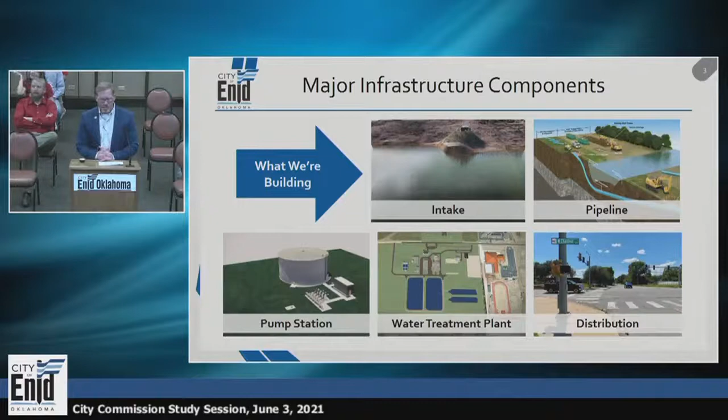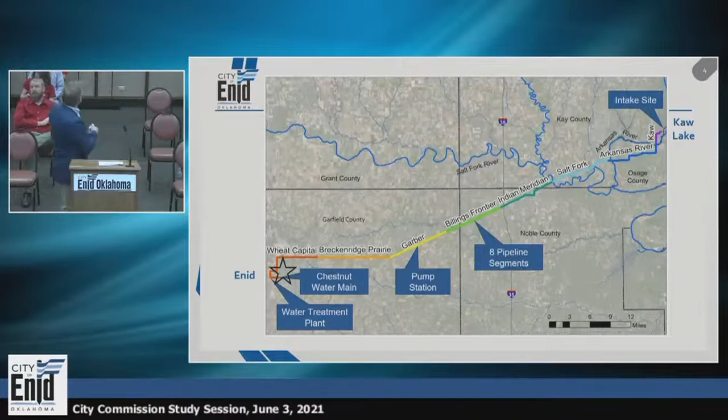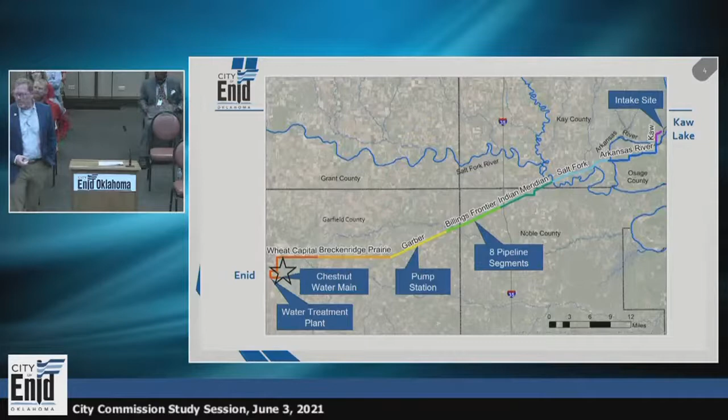And then this is a map that shows what I just talked about. As you can tell, we're starting over at Kaw Lake, which is just on the east side of Ponca City. It runs diagonal across 3 of the counties here into Garfield County, the last county. It does parallel an Oklahoma Gas and Electric overhead power transmission line. They've got a 100-foot easement, and the City of Enid's easements are adjacent, right next to that is a utility corridor across this land. Moving into around the west side of Enid to the new water treatment plant, and then Chestnut Water Main.

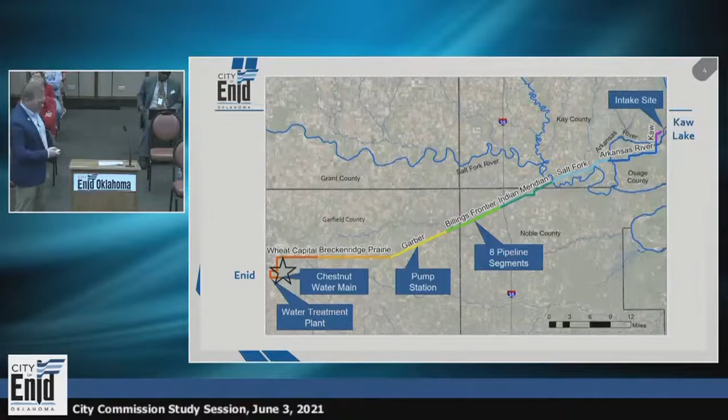All right, design. As you can see here, design is complete. Since last time I briefed, we have acquired 2 more permits from DEQ to construct. The intake pump station has been approved, and Chestnut Water Main. So all the linear work is permitted now, as well as the intake. We'll be finishing up or getting the permit from DEQ on the intermediate booster pump station and water treatment plant shortly. No hang-ups on it, it's just a matter of process.

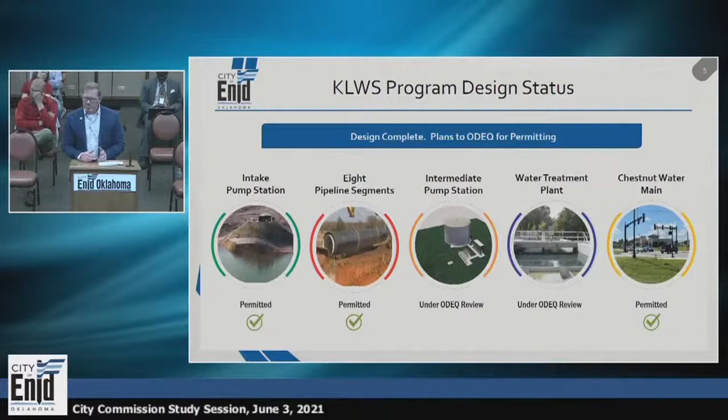Other permits: as many of you are aware, the big NEPA environmental permit was received right at the end of last year prior to getting the authorization for GMP. We also have the 404 wetlands permit approved, the 408 for the USACE land over at Kaw Lake. All ODOT permits are received, so there's 8 ODOT crossings across that 70 miles that have all been approved.

The DEQ, as you can see here, 10 out of 11 have been approved. Union Pacific and BNSF railroads, there's a total of 4 of those. 3 of those are in process. We've submitted to them and should be approved at any time here for 3, and there's another one we need to submit and get that moving.

Our last thing here are the county road crossings. As I mentioned, 4 counties, with a total of 63 county road crossings across that 70-mile pipeline. Garfield County is the first one to start. Those are the bids that were open today, and yeah, we need to get those ones started. So that one is critical.

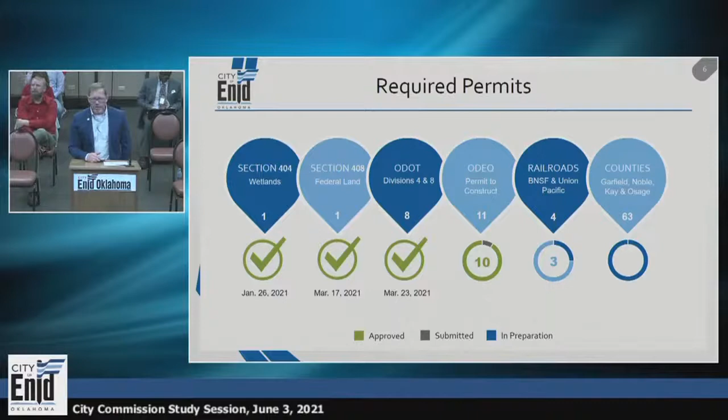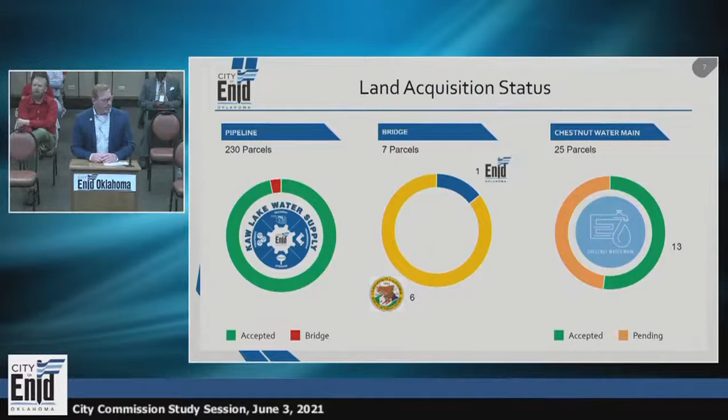Land acquisition has been a phenomenal success story. 2 of the biggest challenges for a long linear project like this are environmental and land acquisition. You've checked the environmental box very successfully, and land acquisition is almost there, continuing to move forward. Out of a total of 230 parcels, only 7 remain. One of those is with the City of Enid, being negotiated, and the other 6 are with the Bureau of Indian Affairs, also in good status. We anticipate those being buttoned up soon, but it will not impact contractors' ability to proceed and do work on schedule.

And last, Chestnut Water Main: 25 total parcels there, 13 of those have been acquired, so 12 left. We're continuing to plug away at that. We started that just in February this year, so in about 3 months' time, we've made a lot of great progress across that 3 miles along Chestnut.

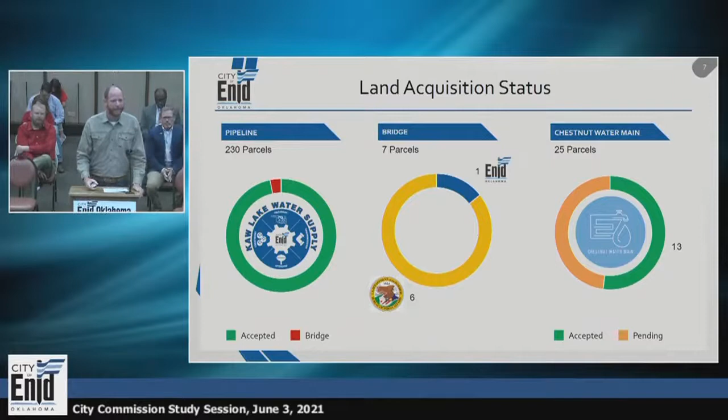Good evening, I'm David Burkhart with Garney Construction. For those of you that haven't met me, we are the construction manager at risk for the project. I'd like to give a very brief update on where we are with construction status.

Currently, we have a couple of things different going on with regards to construction and procurement. As mentioned earlier, we took our 3rd solicitation set and received bids on those today. Very good participation, we're very excited to see that. Received roughly 30 bids on 7 different packages, so very good turnout and we're very happy.

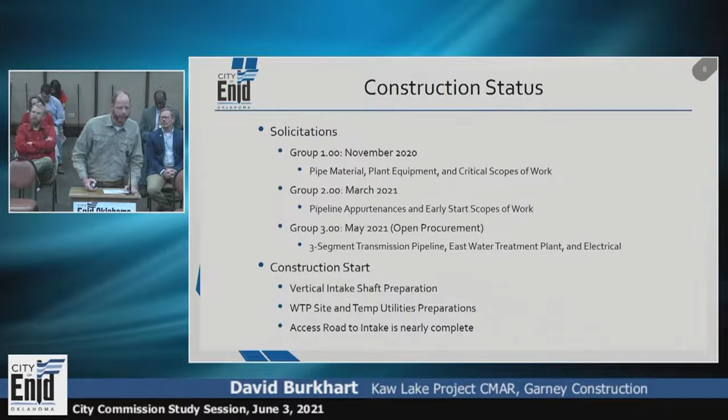Going back a little bit, our first solicitation was in November of 2020. Second solicitation group was in March. 3rd we took today. At this point, we have procured the majority of the project, including the transmission pipeline, majority of the treatment plant -- at least the east side -- plus some of the more critical components there with the mechanical equipment, electrical gear, things of that nature.

Construction has started, primarily out at the intake site. We have a video and a couple other things to take a look at, but construction is underway out at the intake facility on Kaw Lake. The water treatment plant equipment has mobilized to the site. Recent weather has not been favorable for jumping into that head first, but as soon as things dry out a bit, you'll start to see a lot more activity at the water treatment plant site.

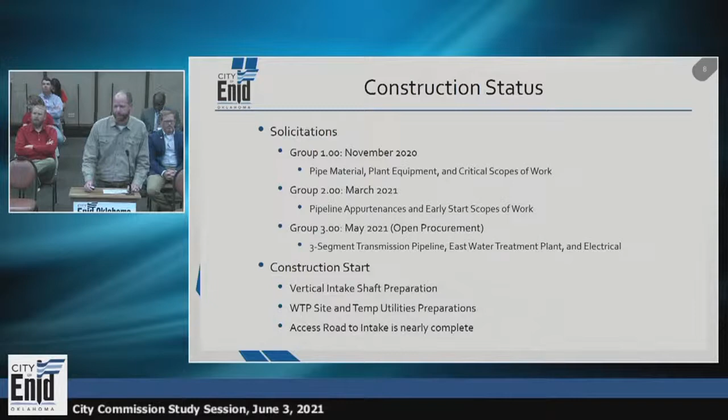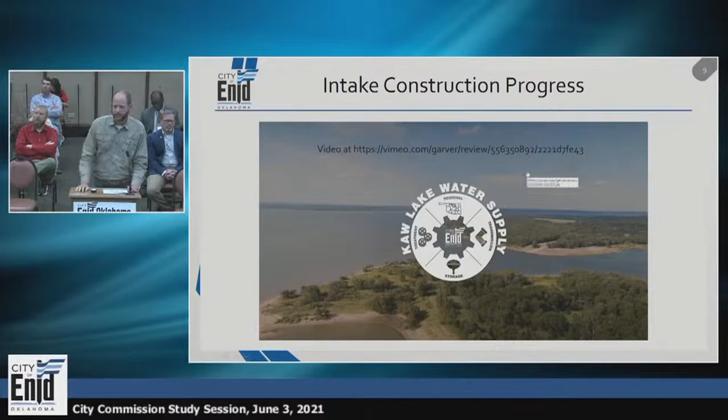This is a very nice overview of the project -- a rendering of the intake header with the 3 screens to be able to draw water at the 3 different elevations of the lake. Some aerial footage of the access road being constructed, with the pump station sitting on top of that knoll. You can see the access road being built to gain permanent access into the pump station for maintenance and operations. This work started about 4 weeks ago.

At this point, the road's been roughed in. It's beginning to be topped with rock and gravel, and the site's being made ready to begin on the vertical shaft for the intake here very soon.

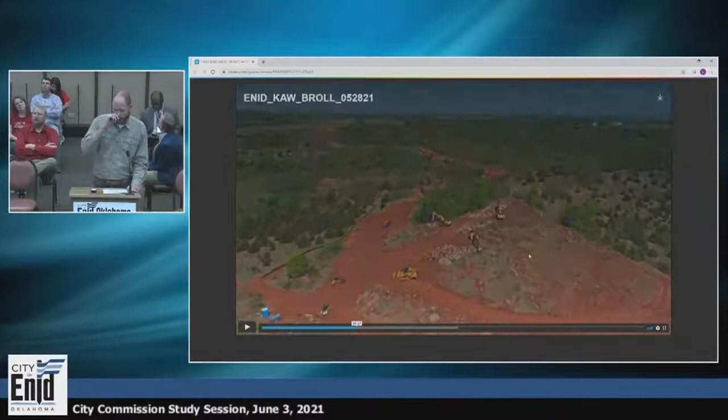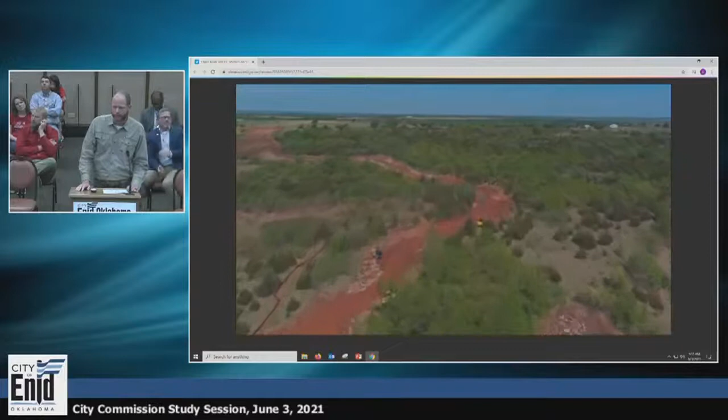I mentioned on top of that knoll's where the pump station sits. That gives you a good visual where the pump station's up on the knoll, vertical shaft down, and then micro tunnel out into the lake to gain access to the water. The pipeline leaves this pump station and travels west across the USACE property, and then, as Eric mentioned, runs southwest along other utility corridors into the west side of town.

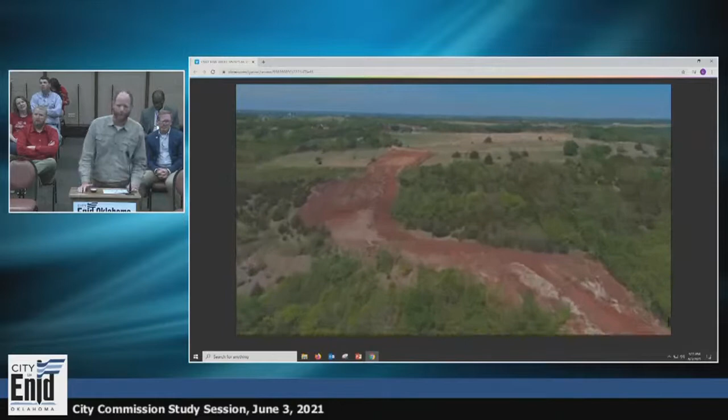Pretty quick video, but if folks haven't been out there yet to see the start of construction, this sort of gives you an idea of the site and how things look today.

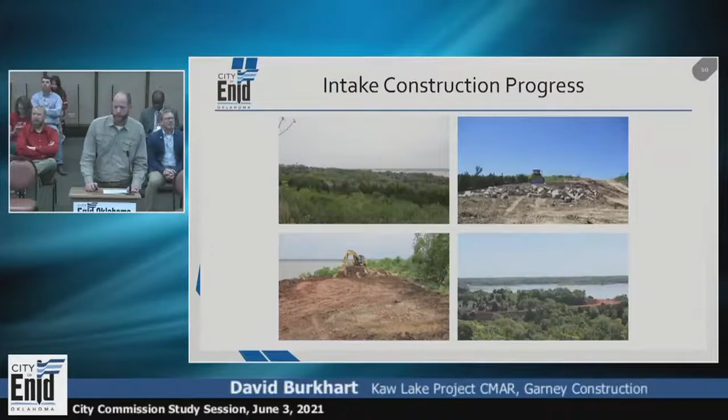Just a few more photos, again, of the same site. Top left is a before photo, and then there are some progress photos of the site being cleared, road being roughed in, rock excavation, and things of that nature. So, very quick update this month, but thank you.

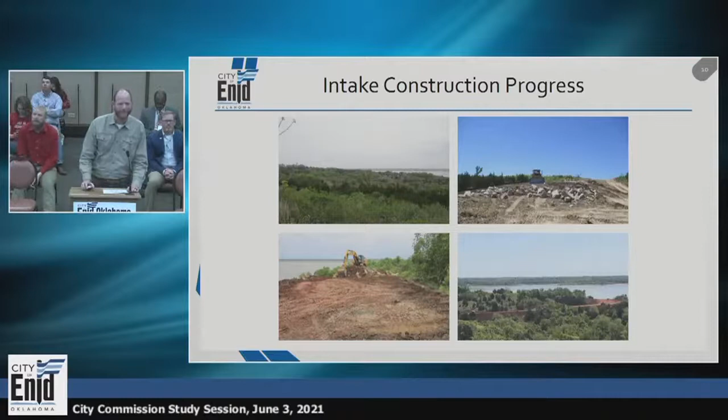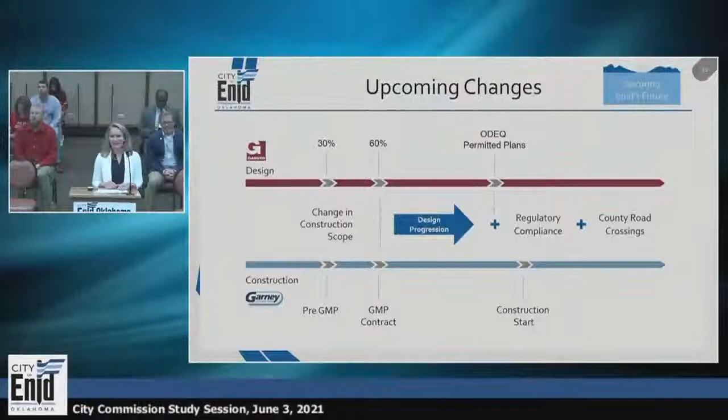Thanks, David, and good evening, everyone. I'm Jennifer Russell. So happy to be here after working on this program for so long. It's really exciting to be partnered with Garney and seeing it come to construction.

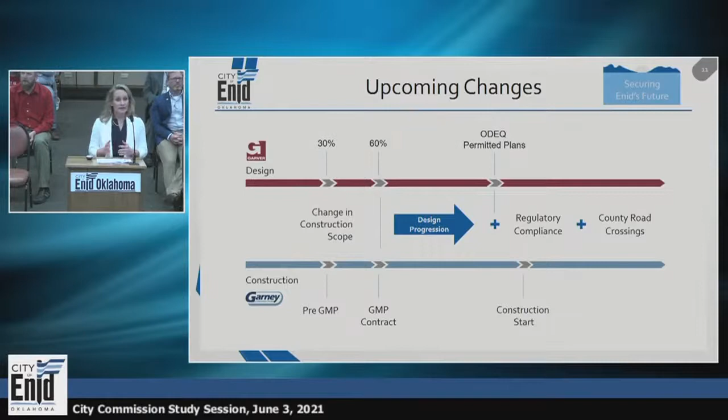On the slide behind me, you'll see a little bit of timelines. We have two timelines. The top timeline is the engineering timeline, and the bottom timeline is Garney's construction timeline that we've experienced. On this program, we've done the engineering design at 60%, a little bit more than halfway through the design plan process. Garney was able to produce a guaranteed maximum price for the city and secure the rest of the contract based on that 60% design.

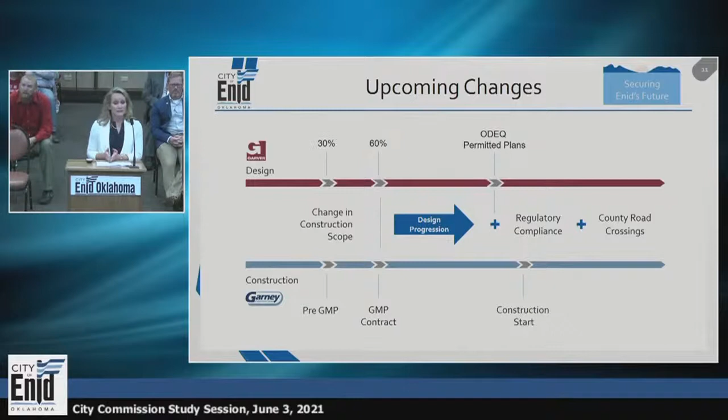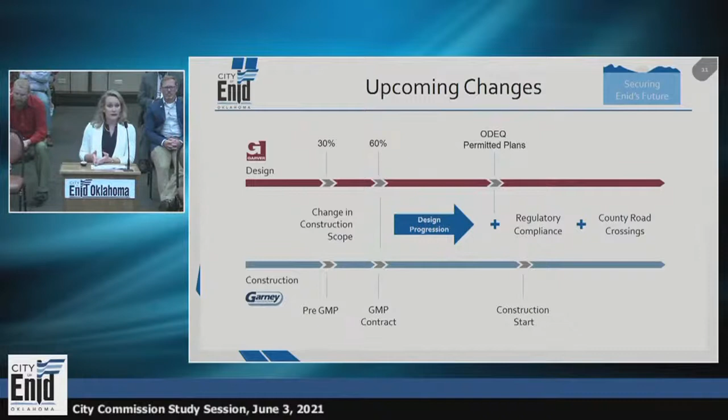Within that 60% plan and within Garney's GMP was an identification that there were going to be changes in the design as the engineering team went from 60% to those ODEQ permitted plans. Once we got those permitted plans, the changes that happened during that process were acknowledged, identified, and incorporated into the program. Once we got past that, though, there are additional changes that have happened over time, and there are new scope items being introduced into this program.

Some of those new scope items are related to regulatory requirements we have to meet to make sure the program gets implemented, and we have a bit of an unknown with some county road crossings that we're just beginning the permitting process on. So we wanted to put on your radar that although we have integrated as much of the change as we knew that we could, there have been some changes that have come to the forefront of this program that now we will start to take a look at.

We're going to do the most that we can to mitigate those changes and keep everything under control. We have been here on the side of the city for the past 4 years. Garney has been our steadfast partners as we have been walking through these next steps, and I can assure you that we're going to do the best that we can to keep those costs under control. But I did want to put that on your radar that there are a few things that will be changing, and we've got them on the horizon, and we're keeping our eyes out for those.

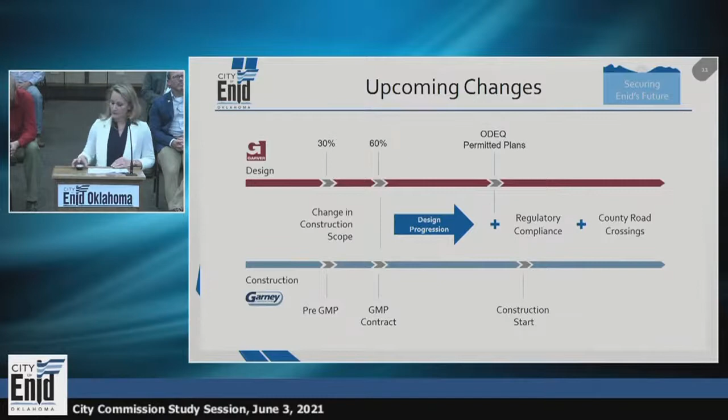Any questions on that one? Let's go the other way.

So those items that we do know about at this point are the things that Jen talked about, the design progression. We know what they are. We're still in the process of pulling together the budgetary numbers to bring that to you. And if you recall, your budget has a $2 million contingency for design progression. The other thing that we have in there to help protect us on that cost is within Garney's contract, there is a couple million dollars of construction contingency.

The things that we know are coming: we have some requirements from the Army Corps of Engineers to do mitigation of our impact onto their property. We're working—we have approval for our mitigation plan. You voted on it not too long ago. We have our construction license, temporary construction license, which you voted on last time. We are working on developing the cost associated with that mitigation. That involves primarily removing some extra cedar trees out of their property and building a fence and gate to prevent trespass, if you will. And so that's what that is.

It doesn't sound like a lot. I don't anticipate that it'll be a lot. I expect it to be a little north of $250,000.

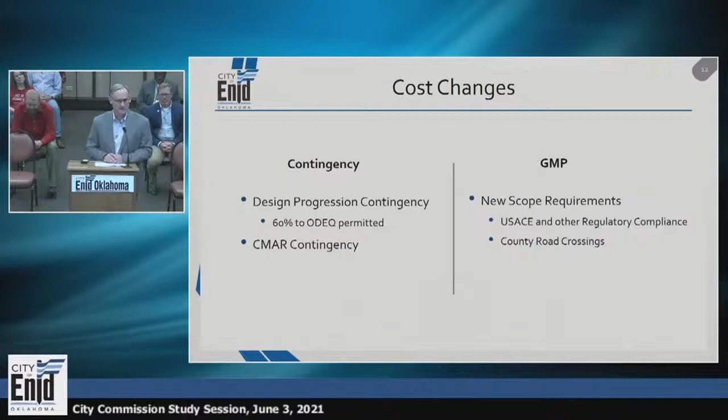The other thing we haven't settled or run all the way to the ground yet is our county road crossings. We've had a little bit of pushback. They're a little concerned about our technical approach to going across those county dirt roads. We're working that, Gerald is heavily involved in that. I believe we'll get that to resolution with minimal cost impact. I think they're very amenable to working with us on that. It specifically relates to boring it or cutting it, so I don't anticipate that'll be an issue. I think we'll all work together and keep moving along with the project. Any questions? Yes, Chris.

As far as the price of the material on the pipeline, do we have that set? We have our material for the pipeline. Okay, David, you want to come up and join me?

Material escalation over the past couple of months has made me very nervous. It's making a lot of people nervous. Yes sir, we did receive pricing for the pipe material back in November, one of the first solicitation sets that went out. Since then, the steel market, along with resin, lumber, plastic, fiberglass, you name it, has increased dramatically. The cost of steel is up over 300% since November. It's a challenge, unfortunately one we're going to have to deal with as we go forward, especially with regards to schedule of the project.

With a project this large, I just wondered if it was possible that they would lock in a price. Normally it's like 6 months when you're dealing with certain really large projects, they give you a price that's set pretty much for 6 months. I know we're just in the phase of beginning construction, but once I watch the price of materials going up, I'm feeling like you guys are.

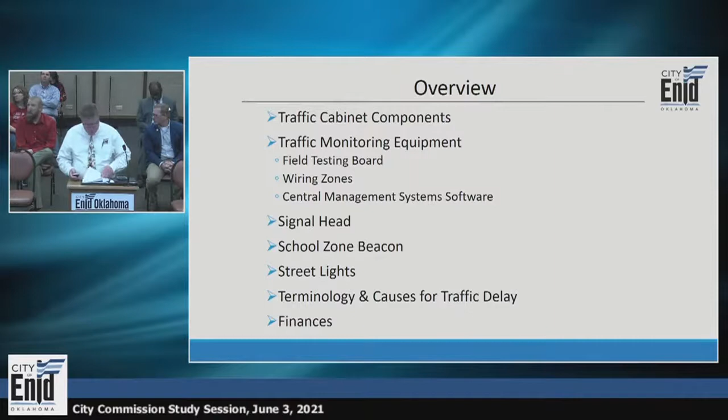In Enid, we have 55 cabinets that we are responsible for. 50 of these are our signalized intersections throughout town, and 5 of them are our emergency intersections that you see for the fire department.

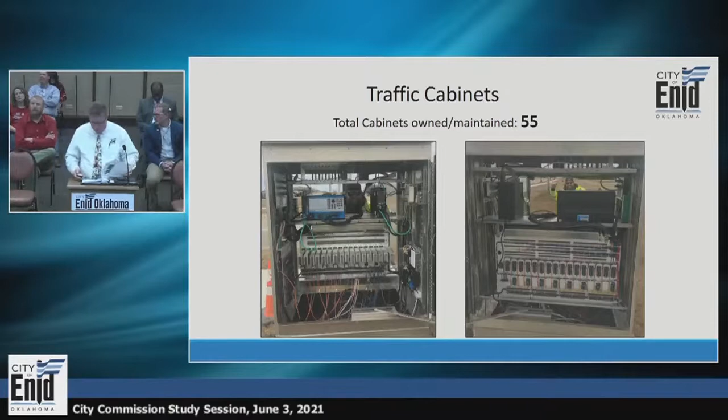Inside the cabinet, this is our signal controller. This unit is fully programmable and networkable. It's the brains of the entire cabinet, and it's fully adaptable and integratable for add-ons such as remote monitoring software, traffic studies, preemption technology, traffic detection, and high-tech camera systems for flow monitoring.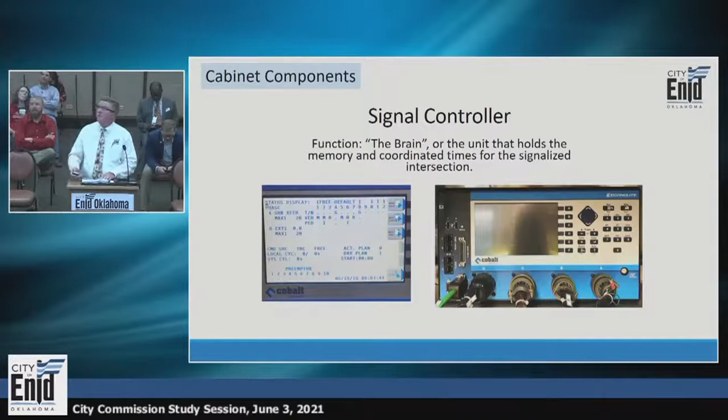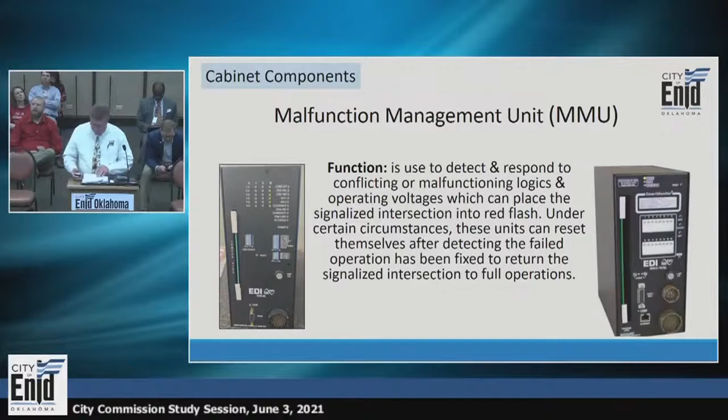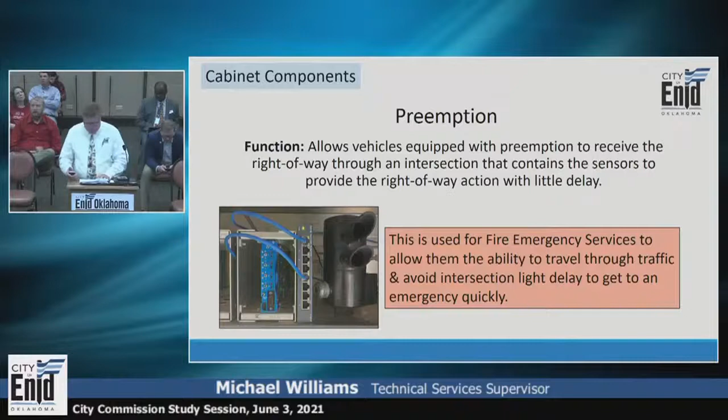Many of our signalized intersections have what we call preemption equipment, which is located in the cabinet and on the mast arm itself. This equipment takes a signal from an emergency vehicle and relays it to the controller, which then gives the emergency vehicle the green light and the right-of-way, helping speed up response times for our fire department in any given emergency, and also protecting the motorists in the area.

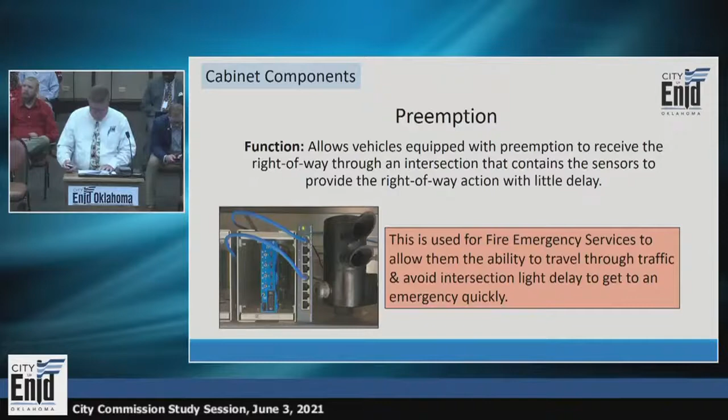Battery backup - most of our signalized intersections have a robust battery backup system which keeps the lights on when the power is lost. These can usually run up to 9 hours on the batteries when the system is in flash mode, and up to 6 hours if it's operating in its standard programmed mode.

Detection systems. In Enid, we have 3 primary detection systems. They're known as loops, radars, or cameras.

Loops are what you see underground, and they detect the metal from your vehicle via a magnetic wave when you drive over it. It's old but reliable technology. However, the installation and maintenance costs can far outweigh most other systems.

In Enid, we're standardizing to radar and camera detection systems. We currently have a few radar systems, such as at 42nd Street, 10th Street, and even the one at Lowe's and Walmart at that intersection between those 2 businesses.

Our camera standardization includes 2 camera systems, distinctly different, but each with its own features and benefits. These are known as Autoscope, which we have here tonight, and GridSmart.

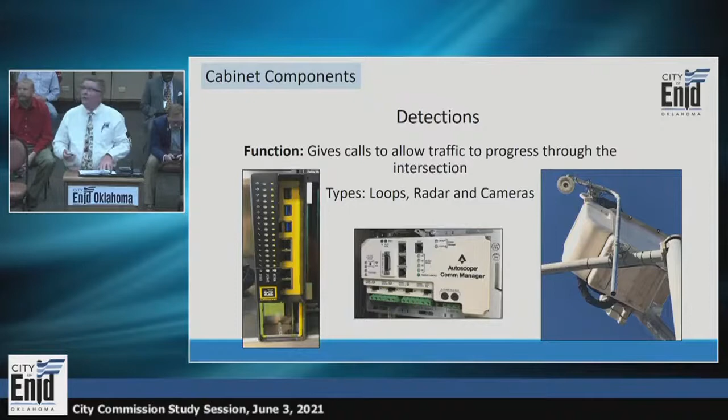A brief moment on our testing board, and I'd encourage you to come out and visit our technical services department anytime and take a look at what goes on behind the scenes. But this is our testing board. It's similar to the portable one that we have inside the unit.

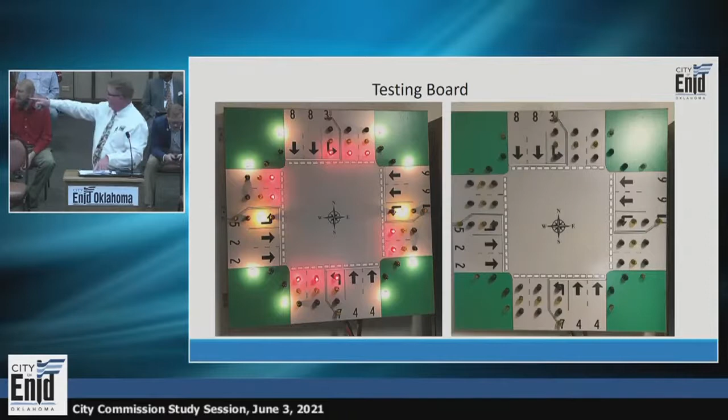You see the flashing yellow lights there on the unit? And so I got our reds, greens, and yellows, and that represents the 4 different approaches from north, south, east, and west. This cabinet board, or this testing board that we have here, we use it to prepare this cabinet for deployment. What we have to do is burn this cabinet in for 30 to 60 days, 24/7, to make sure it has no bugs, no glitches, and it's ready for use.

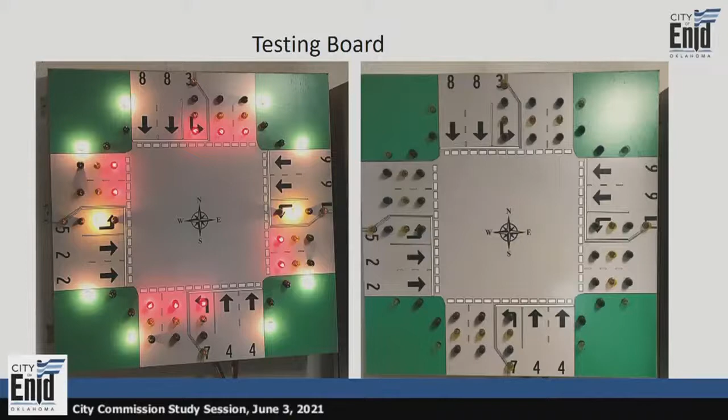I'd like to recognize Lucian, who's here with us tonight, who actually built this board from scratch. He used our supplies and our resources out of our sign room for the overlay, and then he painstakingly hardwired every single circuit, including the pedestrian signals and the yellow flashing arrows that are in that board right there. So it's a pretty awesome piece of work.

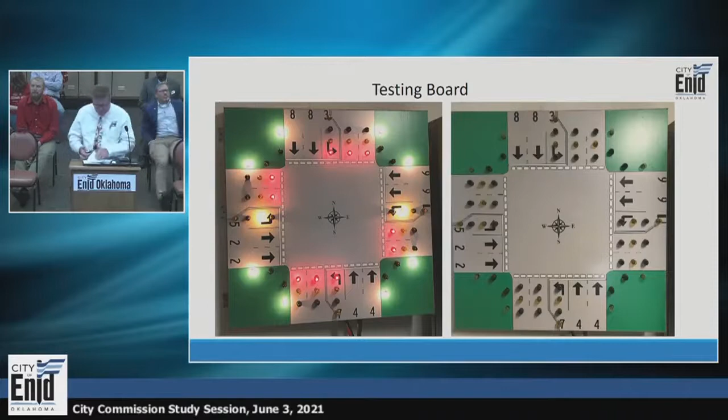Okay, this is Centracs, our central traffic management system. It has so much to offer. We're just getting familiar with some of its primary uses. We have 35 licenses.

Is this new, Michael? Is this something we just got and spent a lot of money on? It is, something we just got, we spent a lot of money on. It'd be great for me to get a demo on that too. In fact, I'd love to have it on my desktop. I'd love for it to work. No, it's okay. We're just... Okay, well, stick with the good stuff, okay? We're getting it installed, and it's in progress. And we're also... Good, I just wanted to know it's brand new. This brand isn't new, something, I mean, we're just implementing it, right? So we're just implementing it.

Frank Sweet and I went to Stillwater to look at some of the equipment they had there, some of the uses that the college has, the football games, they have to be able to move traffic certain ways. And we found some resources there that we could use. We came back and found out how we could apply some of these things, and this is one of them. It's going to work beautifully. It's working very well now, but our network relies on our internal infrastructure.

How many intersections are hooked up to it so far? 14 of our main intersections. Okay, good, north, south, east, west. We got 54 or 52 or something like that? We got 50 total. We're doing 35 total, including the 14.

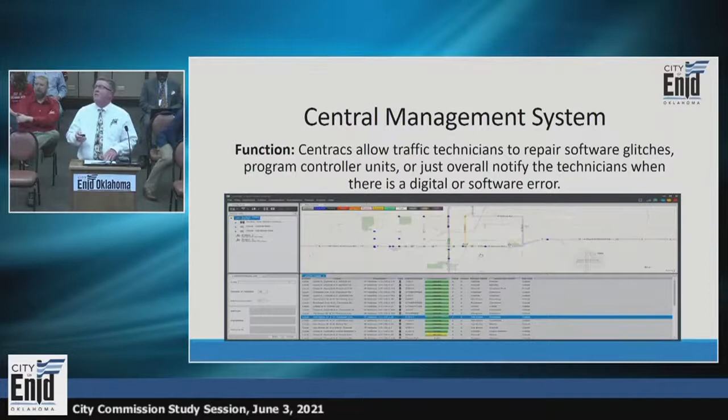We thought about bringing one down here, but it's just too big, it would take up too much room. We're going to light it up. Has everybody seen one? Okay, we're good. They're big.

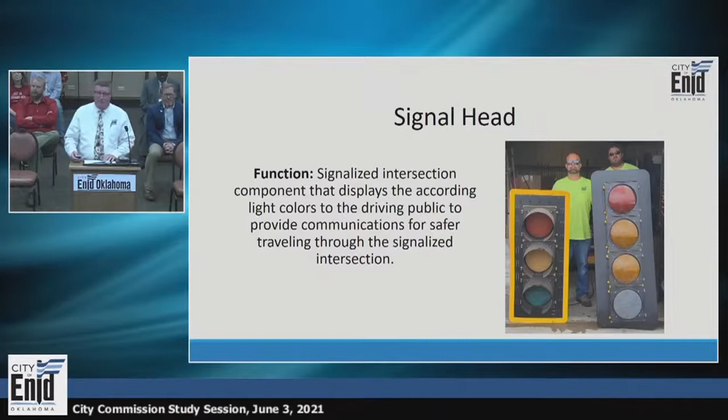Talk a little bit about school zone beacons. We have 42 school zone beacons here in Enid, including Pioneer and Chisholm. We monitor these beacons remotely from our traffic room using a program called Glance with AI hardware. AI is for Applied Information, which is the unit that's inside the box out at the beacon. It's connected via cellular network, which gives us the ability to manage schedules and changes. This came in very handy during the pandemic, and even as recently as yesterday. We had to make some changes because summer school is starting. They made a phone call, and within an hour we had all the programs in and beacons ready and running. So a lot of it you can just copy, paste, that sort of thing.

It makes life so easy. This equipment is integrated with an app called Travel Safely. This app can run in the background of your phone, and it will alert you if you're speeding in a school zone.

And we want to take that to the next level next year.

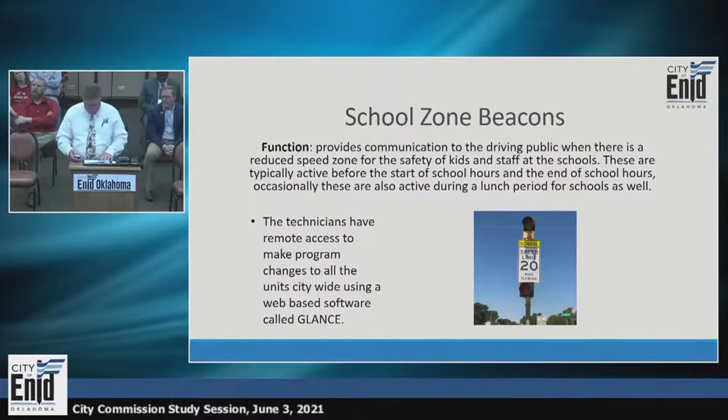Now, with that being said, Eric Benson Boulevard, those are ours. The Colonial Street lights downtown, those are ours. The lights at Champlin Park are ours, but the ones at Government Springs North are not. So it takes a little bit of learning to figure out who owns what, but chances are we have roughly 300. The vast majority of the others are going to be OG&E's.

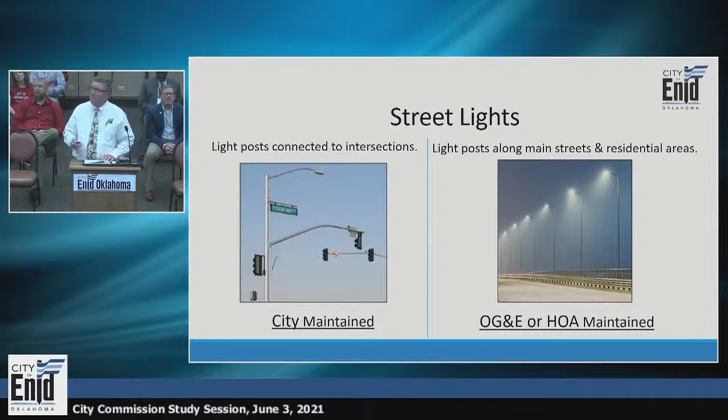A little bit of tech talk. All of these tie together, so if you'll just bear with me. Phase or phases is a term used for talking about the channel inside the controller or the direction of travel. Calls - when the detection system detects a motorist or a pedestrian, it calls for that controller to service that phase and give it a green light when the time comes. Max recall is an override command to give maximum time to all traveling directions.

Red flash is when all 4 directions are flashing red. Fail-safe is often miscommunicated as a red flash. The true meaning of fail-safe is when the detection system fails to give a call, either due to faulty operation or bad weather, and it forces the intersection into maximum recall until the errors are resolved. Sometimes these errors are self-corrected.

Coordination is a term we use for the time set to run for each direction of travel through each corridor. These times are set in place after traffic studies have been completed, then Centracs kicks in and improves all of this on a daily basis if it all works well. The most recent traffic study done here was in 2018 on our Van Buren and Garriott intersections. So we have that data going into what we're doing.

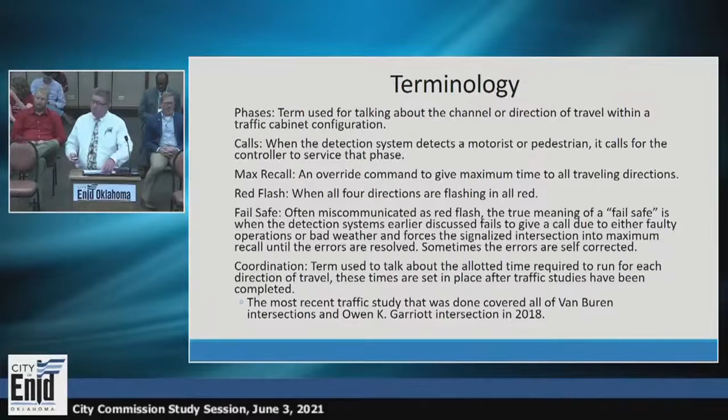Causes for delays, our favorite subject, right, okay. There are many reasons for traffic delays. Waiting on the set time for coordination can be the most common and the most frustrating. Other delays include emergency vehicle preemption or even pedestrian calls whenever school is let out. And then there's storms, fog, dirt, soot on the lens, and even good old sunshine can blind the cameras if they're not properly mounted and calibrated.

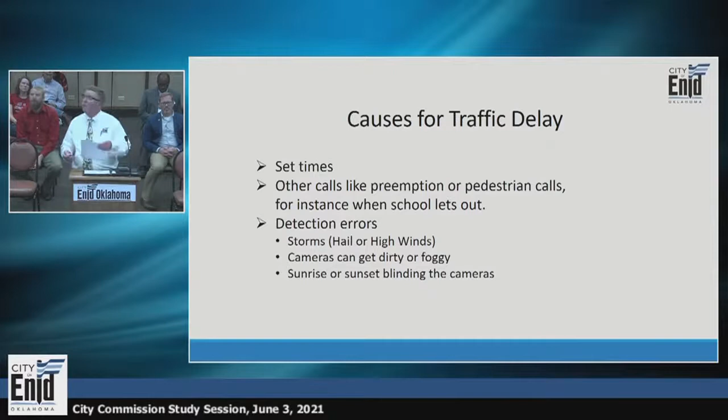And then what we've all been waiting for, the financial end. In 2019, 2020, around the time I was hired and brought into the City of Enid, we had 50 of these blue Cobalt controllers purchased and were going out into the field.

At that time, we decided as a group to buy 8 new traffic detection systems after a thorough vetting of all the equipment and vendors out there, their features and benefits, and how they could help Enid. Then we brought in the remote traffic monitoring system, the Centracs signal performance management system, for the 35 intersections and the 14 on Van Buren and Garriott. And then we bought 3 cabinets and 3 battery backups. This was, again, in 2019, 2020.

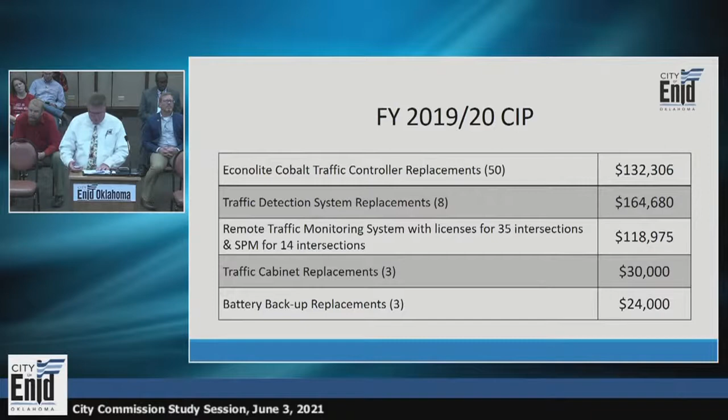In 2021, we added to our cabinet inventory and bought 4 more cabinets and 4 more battery backups. We rewired 2 intersections, Oakwood and Chestnut, and Oakwood and Garrett. And we bought 50 new conflict monitors, 50 new MMUs, to replace the equipment we had in the field.

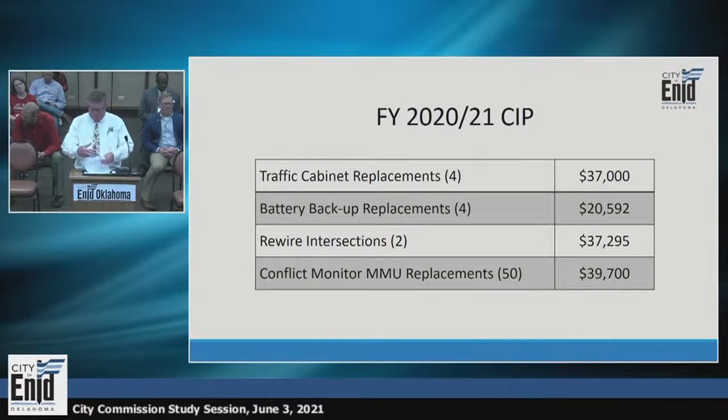This upcoming year, we would like to do 4 more intersections as far as the rewire goes. We're going to buy 8 more detection systems. We're going to add left turn flashing arrows to 2 intersections, hopefully. The goal was to do 1, but I'm optimistic we can get 2. And then we're going to buy 5 more cabinets and 10 battery backups so we can get some equipment out there backed up that doesn't currently have it.

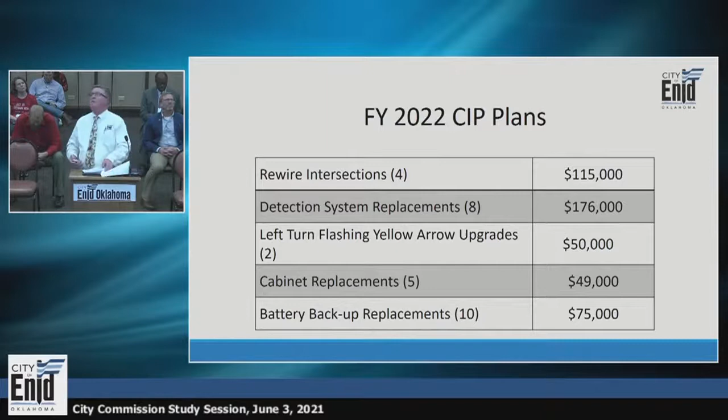Were those acts of God, or what happened? Well, one was taken out by a neutral wire that was cut, basically a direct short. It was at the district construction site, and when they cut the wire, it fried our cabinet. Haven't we lost several to vehicle accidents? And we lost 2 to vehicle accidents.

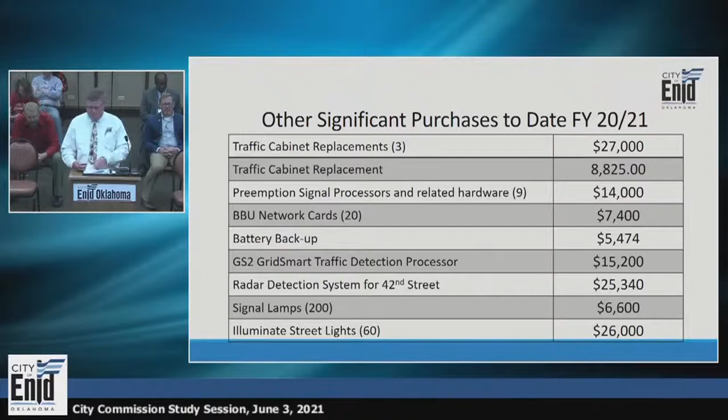Yes. Oakwood. Please, public, pay attention. Please don't hit our cabinets. Please. At Oakwood and Willow, a brand new pickup, 1 day old, plowed right over it and destroyed it. And then at York and Van Buren, there was a medical event, and a person rear-ended someone, knocked them into it, and put them up in the front yard with our cabinet underneath the car.

If there are accidents, does our insurance cover that, or does the driver that caused the accident? The driver, I would assume the liability, the owner of the vehicle. We submit claims to legal. Yes, and we also have insurance as well.

We had a school zone beacon knocked down over by Prairie View recently. That's already been paid for, and we haven't even gotten all the parts in yet. So we have to deal with what a lot of people deal with, the issue with getting microprocessor parts and delays. In fact, I was going to ask about that one. Yeah, it takes a while. 6 weeks is not unusual, 8 weeks.

I'd like to thank Faith Melton, Chester Martin, Lucian Odom, Michael Aguilar, and Jordan Blom for their assistance in putting this together for you. And then, for the sake of time, this is kind of put way over here, if you want to come up and take a closer look, or we can do a little demonstration from there as to what all these components are.

They're kind of hard to see. Before we do that, what questions do you have for Michael or his team?

I want to say I remember that intersection at York that got hit, because I think you and Lucian and your team, or some folks on your team, were out there pretty much all weekend trying to get it back up and operational as fast as you could. And so I appreciate that. It's an inconvenience on a tough, busy road like that. I appreciate your efforts. That's great customer service.

But the public, unfortunately, this could happen to all of us. When something gets taken out, sometimes it takes several days to get things back in operation. So drive carefully.